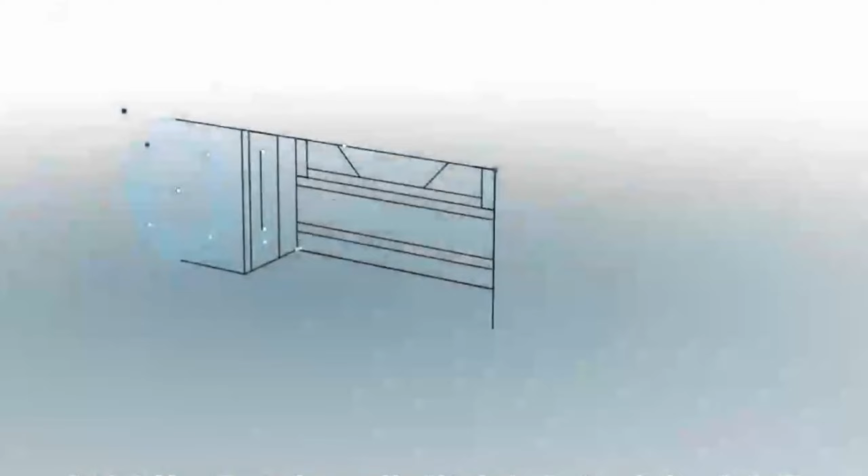Join the club and design and build my own version. I started planning this thing in Fusion 360 last year. That's the software I'm using here, and right now you're seeing a quick rundown of that design process.

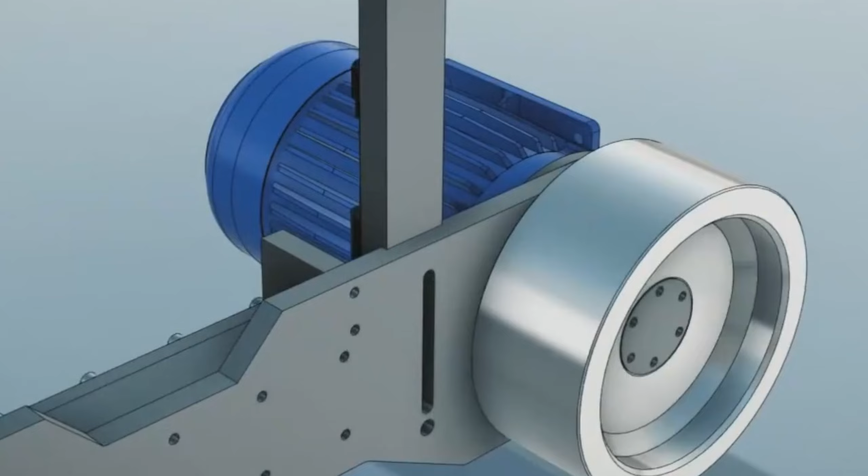The idea was to give myself a challenge and go all out on this thing. So the goal wasn't to make this fast or easy to build, but to basically overbuild and maybe even overcomplicate things a bit, because for me it's just more interesting to make that way, and it also means I can potentially learn more things along the way.

I tried to include pretty much every feature and adjustment that I thought might be useful to me in terms of functionality, but I also made some design decisions just based on what I thought would be interesting to make, or even just for looks.

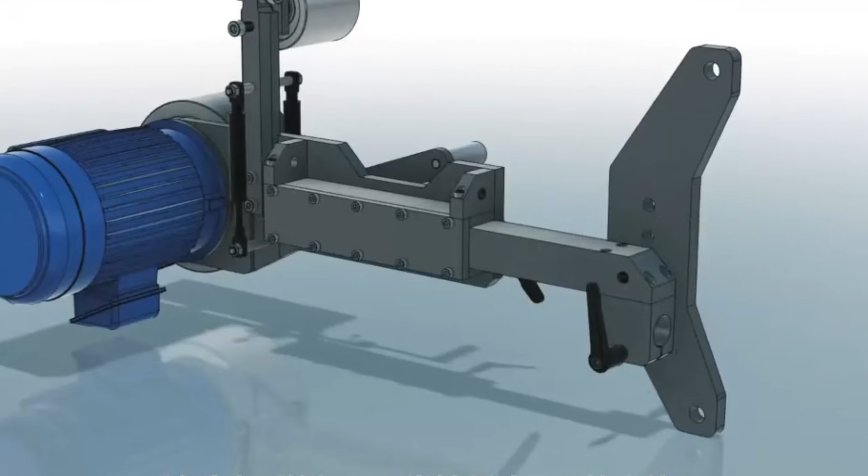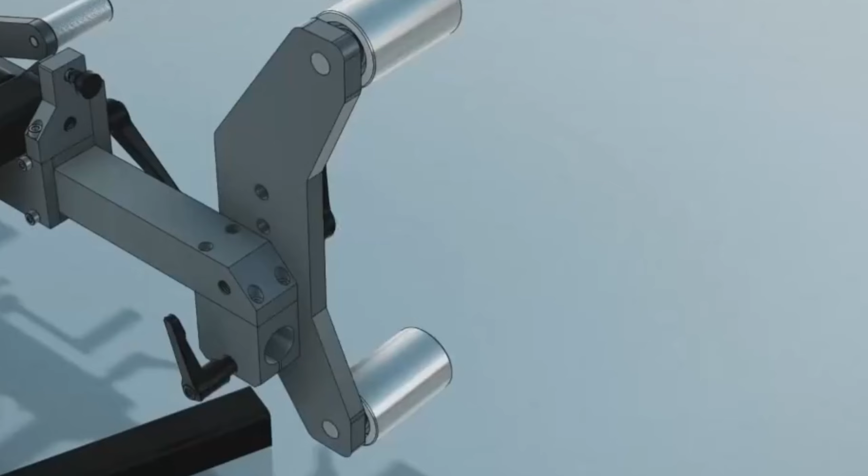This type of machine is most often used by people who make knives, but that's actually not my focus here. I'm not really into knives. I mostly need this for general metalwork, and that's why I chose to use a wider belt than the common 2x72 inch size. So this is technically closer to a 3x72 inch grinder, or to be accurate 75 by 2000 millimeters, because I'm not from the US, so my belts are metric, and also inches give me nightmares anyway.

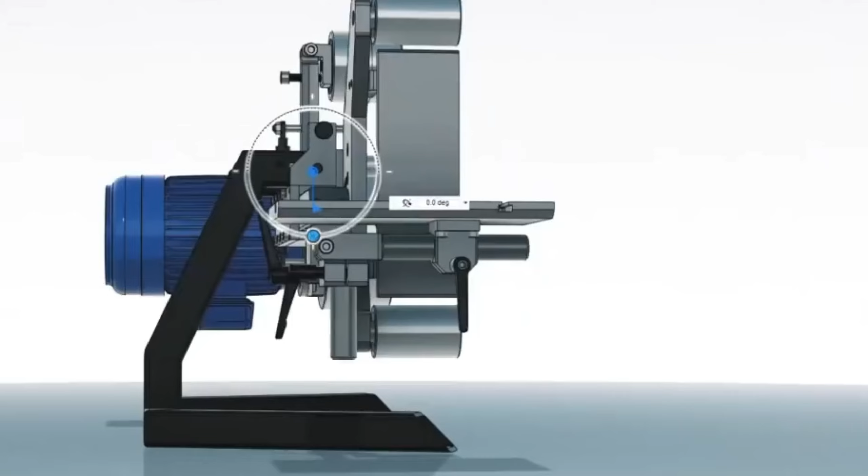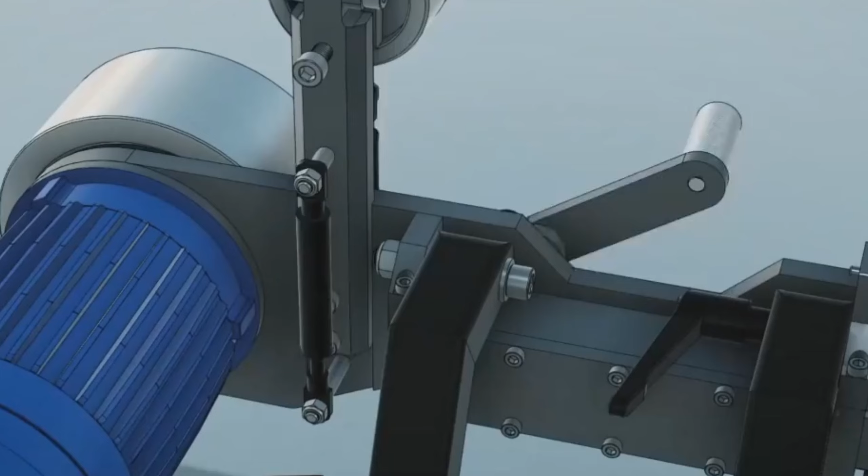This build was pretty complex and it took a long time to complete, so in order to keep this video somewhat reasonable in length, I'm going to split this into 3 parts, and I'm going to give you more info about all the stuff you're seeing here as I'm building it. So for now, let's just jump into the actual build and start making the first part.

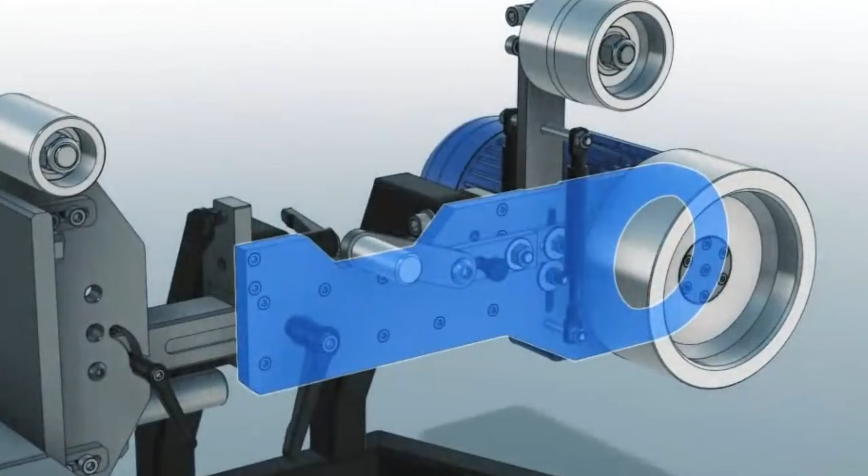And that would be the main plate here, which is the biggest part and also the one that took the longest to make.

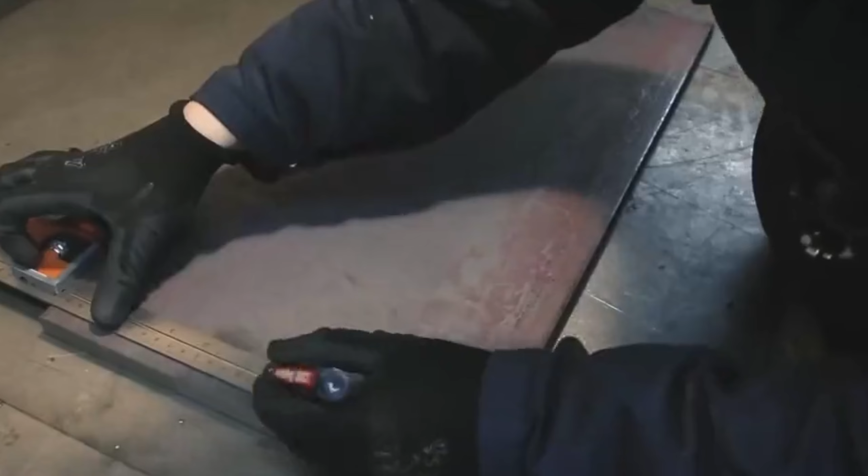I started out with this big steel plate. This is just basic hot rolled steel because it's cheap and I'm cheap. I bought this large enough so I could make 3 big parts out of it. So I had to cut this into 3 pieces, and unfortunately it's way too big for my bandsaw and too thick for the plasma cutter. So I had to use my angle grinder, which took ages and wasn't very enjoyable.

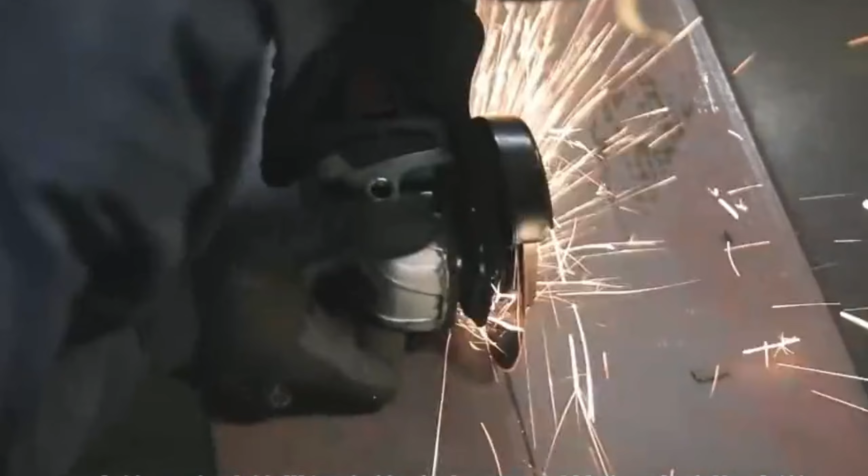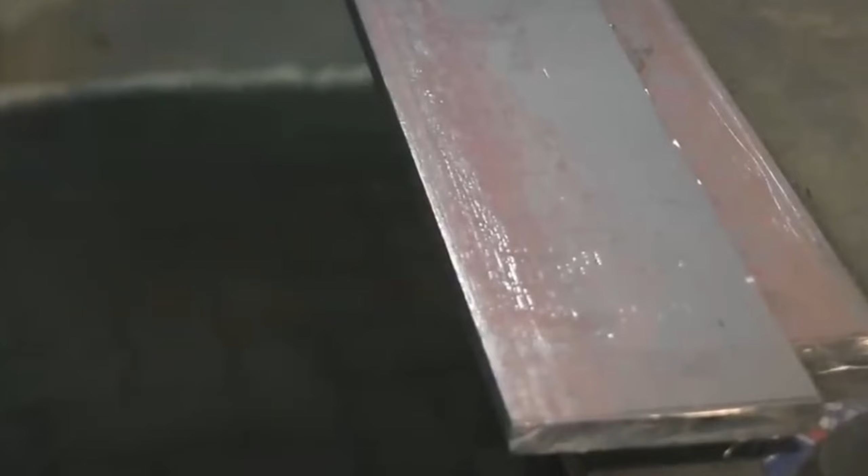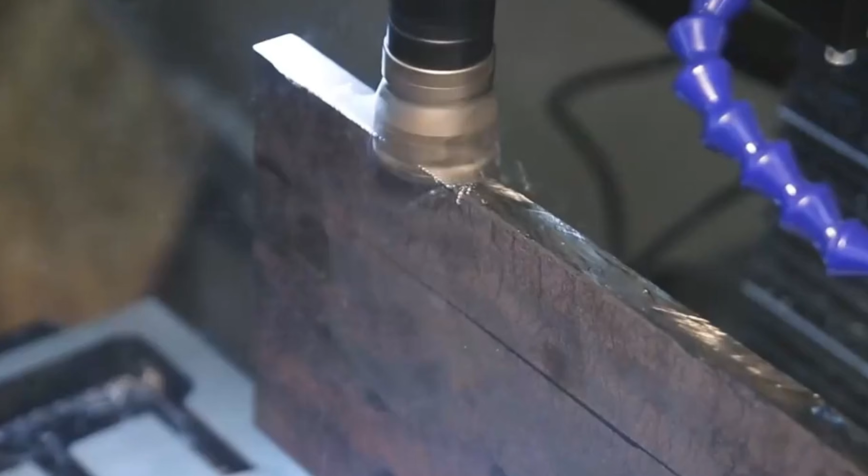Now I can take this over to the mill and face that rough edge that I just cut to create my first clean reference surface. And I drew on the rough shape with a marker there, just so I can see what's what and keep myself from making any dumb mistakes.

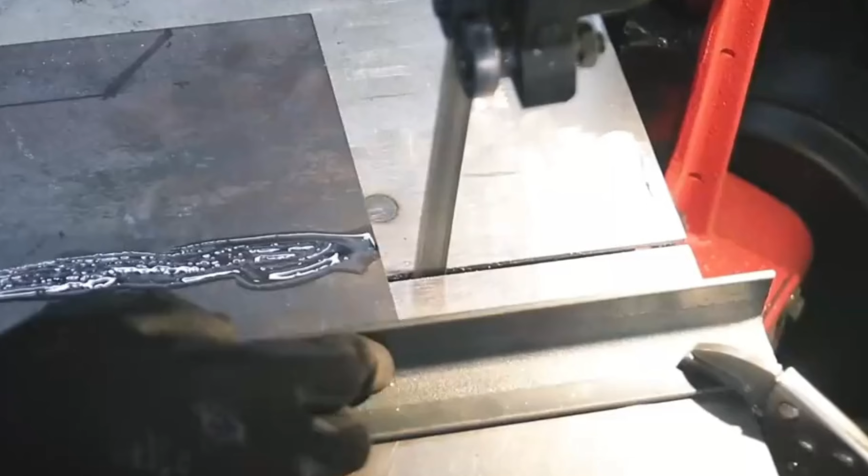Now that I have one side that is flat and straight, I can flip the part over and face the opposite edge, and that way I got 2 edges that are straight and parallel, which is a good start for measuring things. This piece is now small enough to fit into the bandsaw, which helps cutting out this chunk on top here.

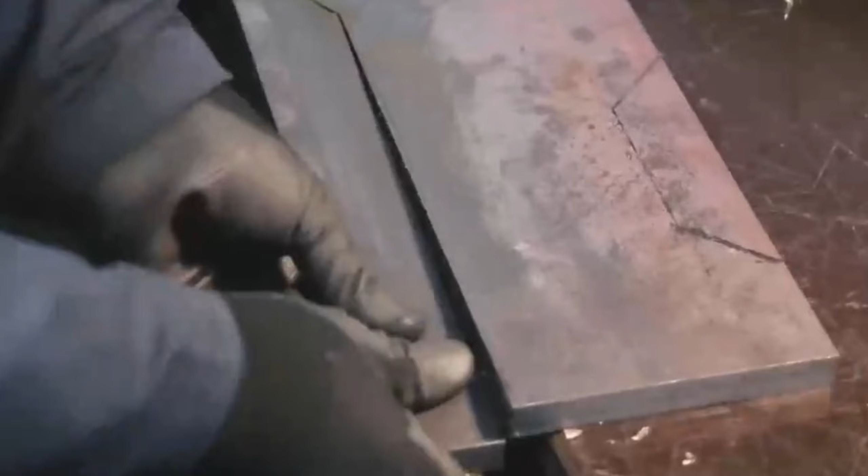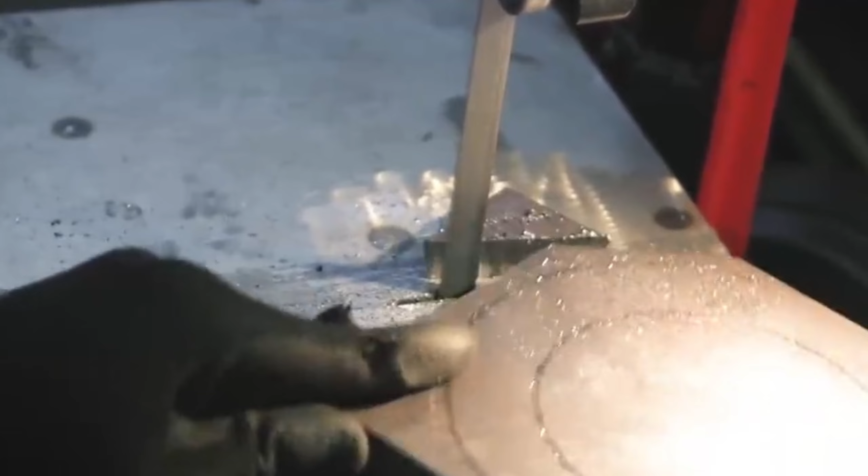Right now I'm just kind of roughing out the outside shape, but all of these edges are going to be machined eventually. Now the part goes back into the mill and I can clean up the cuts I just made.

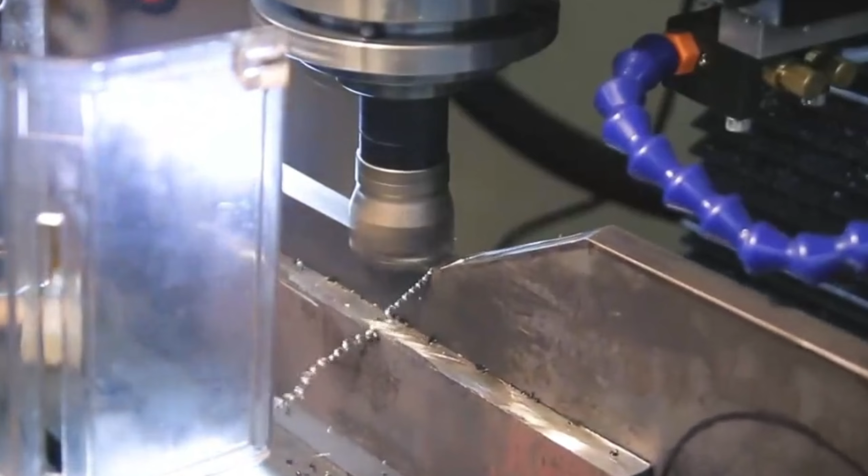The narrow section of the part now fits into the vise, which helps me to clean up some of the remaining edges. And technically it's not necessary to mill down every edge, but I do need some of them as a reference for measuring, and I also just want everything to have a uniform flat machine surface in the end, and not a mix of saw cut and machined edges.

I'm cutting a slot in there now, which is going to help me to remove this piece on top there. And while I'm at it, I'm drilling a center hole that will be the reference to create the large circle at the round edge at the back.

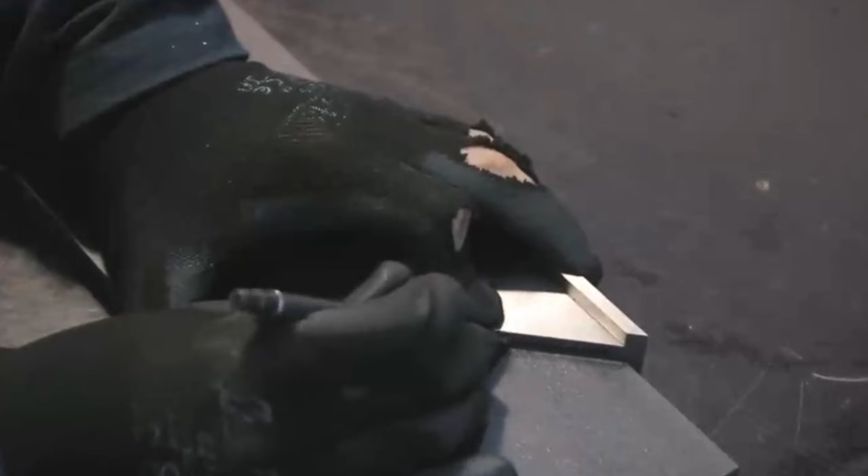This cutter has a 45-degree angle, which helps me to clean up these diagonal edges.

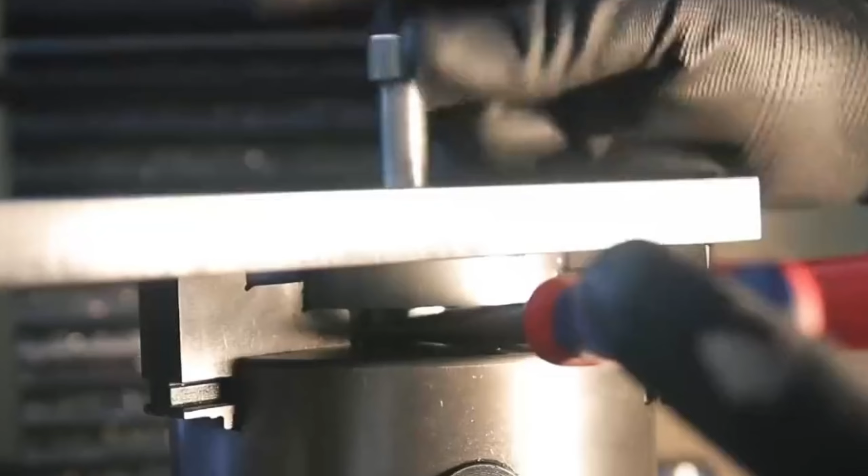Doing some finishing with the file, and now everything goes on the rotary table to create the round shapes. And I'm getting a little creative here to mount this onto the chuck because I'm usually too lazy to take that off and attach things directly to the table. But it also has the advantage that I don't need to remove my vise.

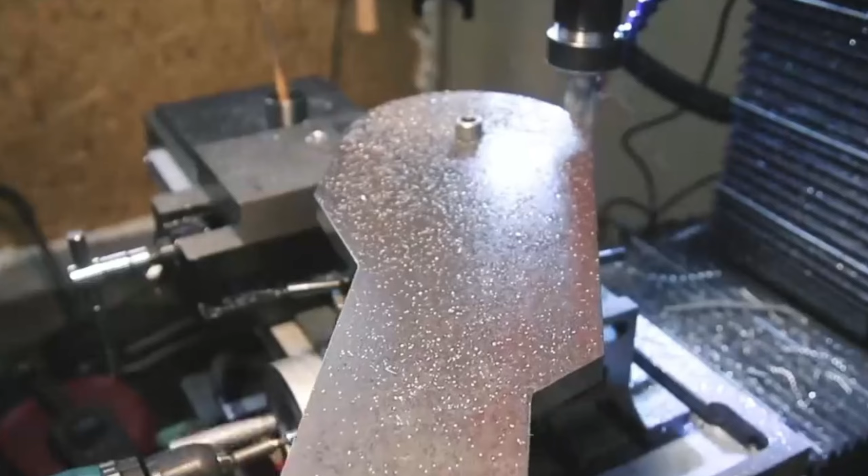So I can now spin this around, and now I'm side milling the outside edge. I was kind of afraid to overshoot this cut on the bandsaw, so there's a lot of material left to remove here, which is why I'm using my power drill to help me out a bit.

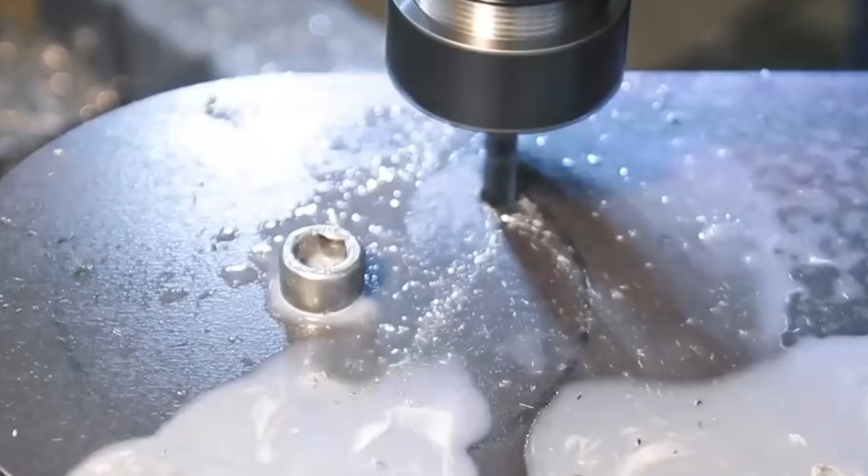To remove this circle, I'm cutting a slot again, but if I cut this all the way through, then at the very end the outside part would just drop down, which is pretty risky. You don't want to risk parts coming loose on the mill. So my solution is to leave just two little tabs all the way at the bottom that are strong enough to keep this in one piece, but small enough to be easily removed.

Now the part is much easier to hold because I can just grab it from the inside using the chuck. And now I'm drilling and countersinking the mounting holes for the motor.

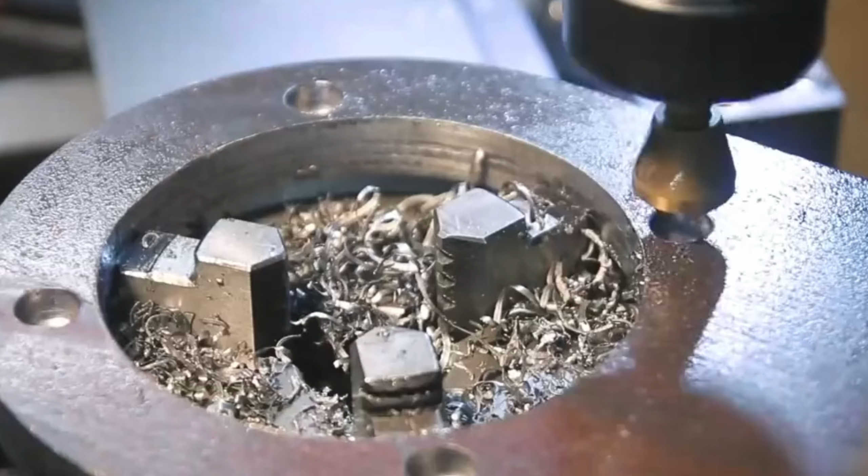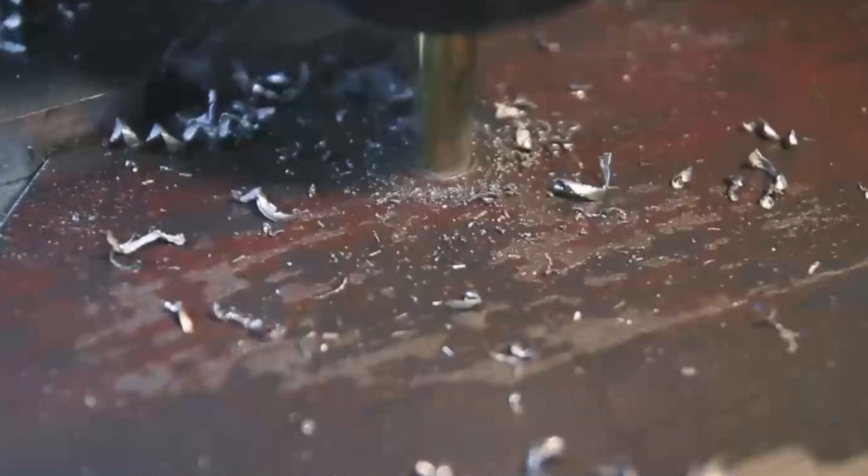It's time to drill all of those other holes now. Obviously these need to be perfectly positioned if I want everything to fit together, and I'm doing all the positioning using the digital readout on my mill, so that's why you're not seeing any scribe lines or center punch marks. I did, however, double check everything with a caliper before drilling, because the more time you put into a part like this, the more paranoid you get.

And to make sure these holes are accurate, you would also normally spot drill them first. But this is a split point drill, which means it has a self-centering feature, and that saves me a little bit of work here.

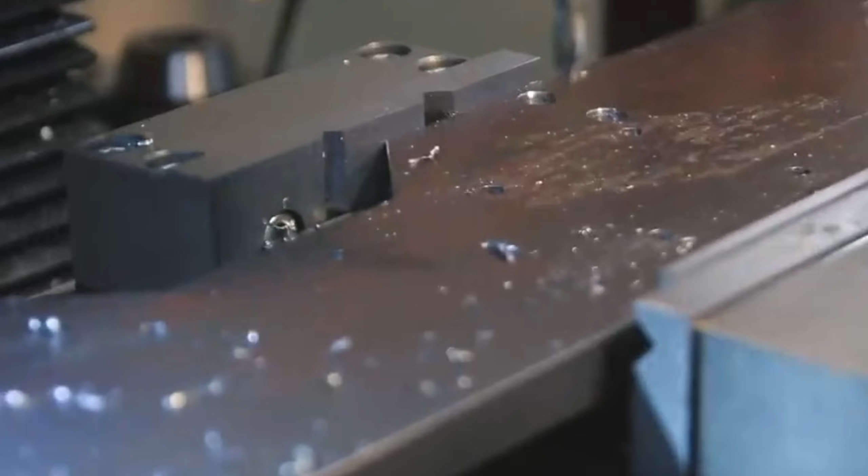Most of these are also countersunk to hide the screw heads, and in this case there's a reason for that besides optics. The side of the machine needs to be flat because the lever for the belt tension mechanism is going to sit there, and it would otherwise collide with the screw heads if they were sticking out.